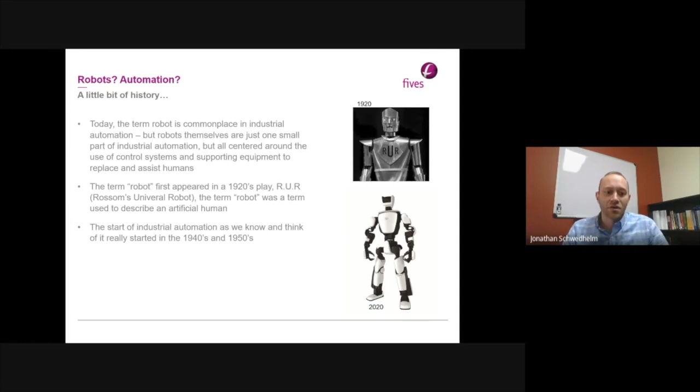So the first example of mixing computers and machines was with the Cincinnati Milacron Hydrotel 3-axis mill. These days, CNC milling is a pretty ubiquitous term. It's used all over the place in manufacturing, and it's kind of like the most basic piece of automation.

While milling machine techniques like turning and milling were first invented in the 18th century, the mid-1700s, and servo motors, which are often used to control those kinds of machines nowadays, have been around since 1834, it wasn't until the late 1940s and early 1950s that engineers adapted these machines to have computer controls to perform the kind of motion that humans couldn't easily do. This really invented the process of computer numeric control, or CNC, which is ubiquitous in manufacturing today.

It was these inventions that really opened the doors to the kinds of machines that we think about today when we talk about factory automation and robots.

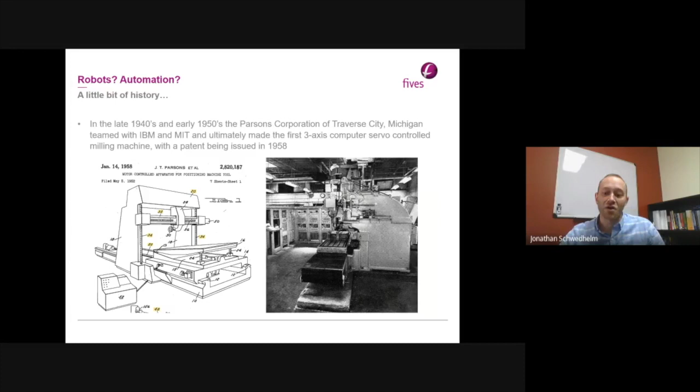So the first patented machine which resembles modern automation was conceived in the 1950s and was coined the Programmed Article Transfer Machine, which is kind of a mouthful. They weren't good at acronyms back then, I guess. But it was a feedback-controlled, servo-driven 3-axis machine for a pick-and-place application.

And at the time, pick-and-place machines certainly existed, things that picked up something from position A and moved it to position B. But what was unique about this machine was that it was programmable and flexible, so they could easily adapt it and reprogram it to each new set of operating requirements.

So this really addressed a problem that we consider pretty trivial and solvable today. Automation or robots like this exist in a lot of different forms. There's SCARA robots, multi-axis gantries, large multiple-axis robots. Those are all off-the-shelf solutions that you can basically pick up a catalog, order, and get it to do what you need it to do with a little bit of programming.

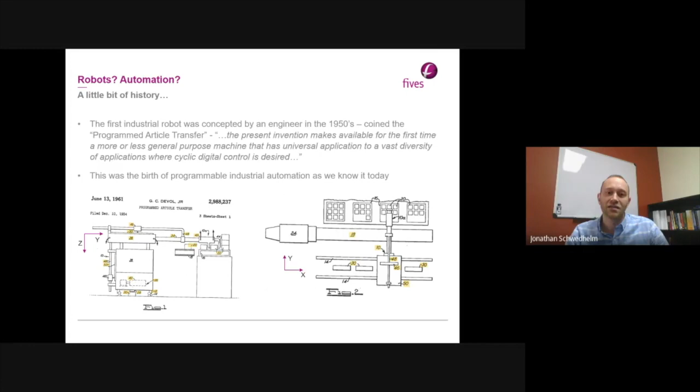But this machine was novel back then, and it really led to the first industrial robot and all the huge advancements in manufacturing over the following decades. So the inventor of this machine partnered with another engineer entrepreneur, and together they started this company called Unimation, and it was based on the East Coast of the US.

And at the time, the US auto industry was already really heavily invested in the concept of industrial robots and automation. So eventually, Unimation found a pretty viable industrial application for their robots in GM's die casting foundry, helping move parts around and in and out of dangerous or hot machines.

And not too long after that, those same robots were used in spot welding operations on the assembly lines. So eventually, one GM plant, which really invested heavily in these robots, was able to produce over twice the number of cars of the next most efficient factory by 1969. This was really huge. It was really a huge game changer.

So factories all around the world kind of caught wind of this and the concept of these industrial robots, and it really became a hot commodity. And people really began to change the way that they thought about processes and adapt them for automation.

I wasn't really able to find a whole lot of detail about the specs of those early robots, but if you search YouTube videos for Unimation or the term Unimate, there's plenty of videos to watch of these robots serving cups of wine and coffee to people, as well as them in actual factories. So they were kind of a gimmick as well as a really useful thing at the time.

But what I was able to find is that the Japanese auto industry really took a huge liking, just like the US did, to these kinds of machines. And they really started implementing them quickly as well.

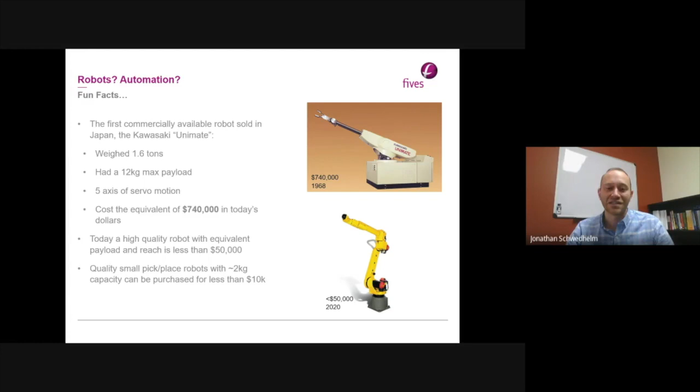And there's lots of really small, high-quality industrial robots from trusted brands that can be purchased for less than the price of a used car, like $8,000 or $9,000. So you can see how industry has really changed as far as capabilities for price.

So from that brief history lesson, it's pretty obvious that the demand for industrial robots and automation is huge. This advancement really relies on companies innovating and pushing the technological and physical limits to create machines and adapt existing processes to meet these needs. So I want to spend a few minutes talking about some of the common reasons why tasks are automated, as well as some of the perceived hurdles that we see our customers have, which are stopping them from automating.

So most of the reasons to automate are pretty obvious and widely discussed. Machines can be designed and programmed to do things better than humans in many ways. Along with that, robots can really be designed to go places and do things that are not safe for humans to do.

Along with that, one of the hugest drivers, obviously, in automation revolves around cost savings and making better products. So this can come in many different forms. Productivity improvements like increased production rates, having better lead times compared to your competitors, reductions in raw material usage or scrap generation, and just general increases in consistency so that you don't have as much of a QA problem.

Of course, along with that, automation can be useful for reducing headcount and thus personnel costs.

So one of the misguided reasons that we see people choosing automation is from a salesperson walking through a factory, dreaming up ways to sell products and solutions, then pushing those solutions to that customer. And obviously, we think it's a really great idea to invite people to your facility to come in and give you ideas and listen to what your problems are, but it's always a good idea to have a good structure around those visits to perform your due diligence before jumping in, especially if you're new to automation and process development.

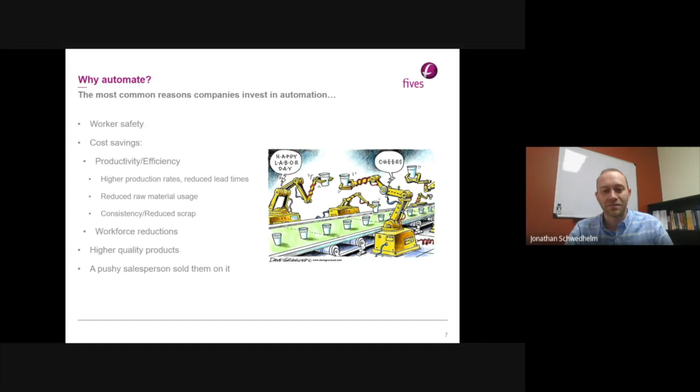So along with that, the top reasons that companies don't pursue automation really vary. In working with our customers, these are some of the top reasons I kind of put together. Obviously, upfront cost is a big thing. Not all processes are really that easy to automate, and the prices can be certainly a stumbling block to get over.

But along with that, capital equipment always isn't available when needed, especially for new companies. And it's a pretty scary thing to write a big check for a piece of equipment or technology that's still kind of unproven or new to you, especially if the supplier is new to you.

One of the other big stumbling blocks is the perceived lack of flexibility. So automation is obviously pretty synonymous with these really large fixed installations that require reinforced foundations, major construction, and they can take up a lot of valuable real estate while you're still just assembling them and pulling them into production. Those are all kind of things that a lot of people consider to be sunk costs.

But that doesn't always have to be the case, because you can design automation to be able to be retrofitted, be flexible, or you can always reuse. If you buy a specific robot, you can always kind of continue to use it in new applications, assuming those applications are conducive to using a robot.

Along with that, some industries, there's a lot of negative connotation around automation displacing jobs. That could be an issue. But two areas that I really want to focus on are cases where there's a perception that the right technology doesn't exist, and companies who lack experience with automation and thus don't really have a strong culture to support it.

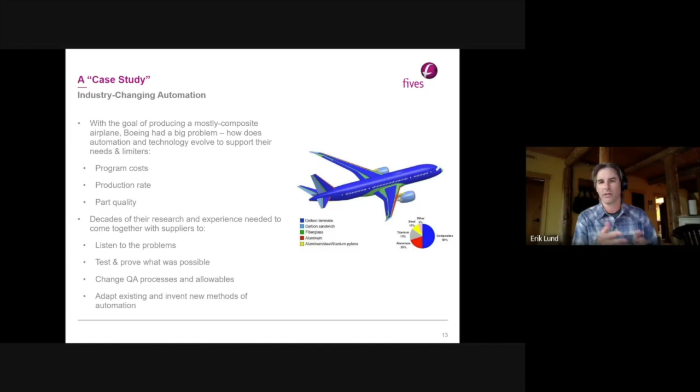Basically they identified that there weren't processes out there, and so what we did is we sat down with a lot of the people at Boeing, all the way from the people who were engineering the plane to the people who were in charge of doing the equipment purchases, and then to the BR&T people, and then all the way to the quality people. At some point we knew we were going to be developing a process that didn't have standard specifications or a way of qualifying the process.

So really, all those people had an influence on how we did the automation, whether it was how we did the inspection systems or how we generally did the adjustments and qualifications of the machines. So even within that realm, we saw, hey, Boeing had its experts, we had our experts, but there were things we wanted to do that weren't expertise we had within those groups.

And so we even looked at, do we need to go outside to trusted suppliers, trusted consultants? Do we need bigger spaces, that type of thing? So I think in general, if you really want to get in and do the things that revolutionize an industry, you sometimes have to have that humility to understand that at some point there might be tools that exist, there might be intelligence that exists, but there might be things you have to go invent or partner with to get to the solution you're looking for.

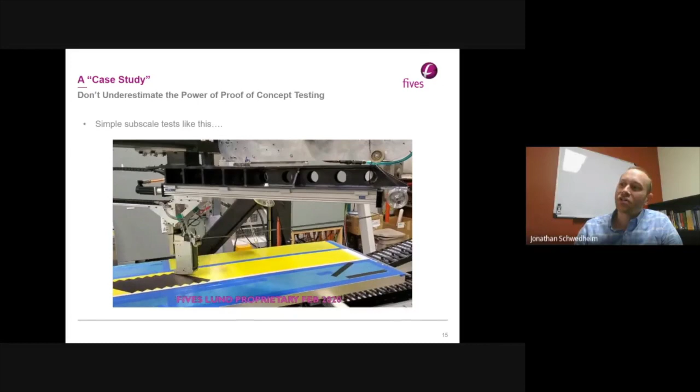So what we were trying to go ahead—sorry, Erik. Jonathan. Okay, so just to get some context, we had essentially a case study where we were trying to develop a new manufacturing line.

This was for some of back when Boeing was interested in doing a new airplane, and the hope was, could we develop the initial enabling technology that would allow us to essentially feed a line that was downstream from this process. And so even though this looked relatively simple, the intent here was that this would feed a multi-million dollar essentially assembly process.

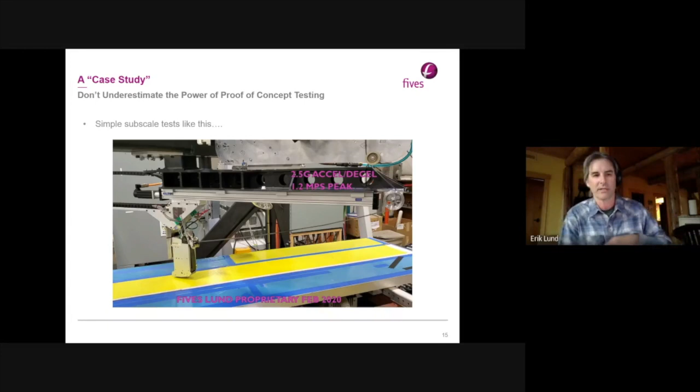And so we had this test here, which is technology that we have, but we also had 2 or 3 other small little enablers. And what we could do is, as you'd expect, we would retire risk on some of those critical items, knowing that there was a lot of other things that would eventually fill in around those critical key technologies. But the intent was, how do we walk to greatness with essentially retiring risk along the way without spending $10 million getting there?

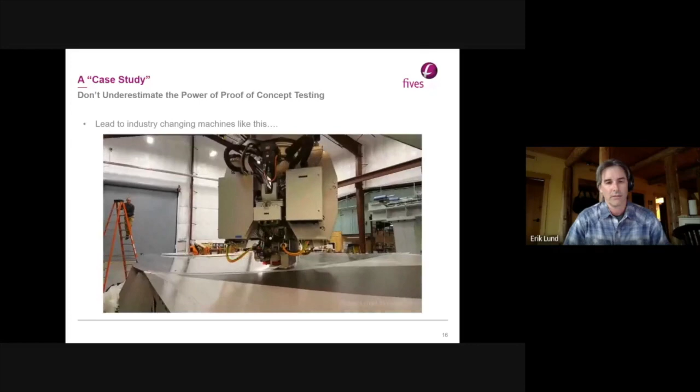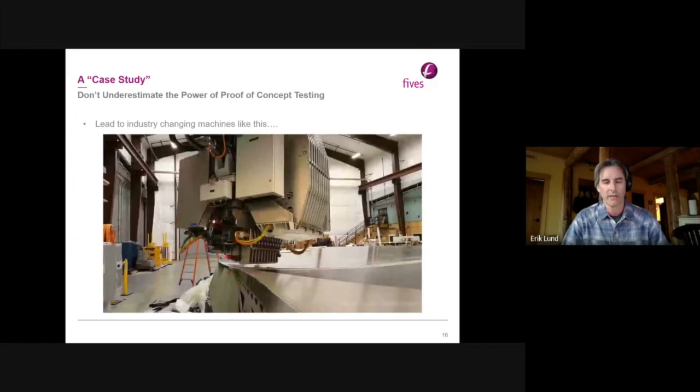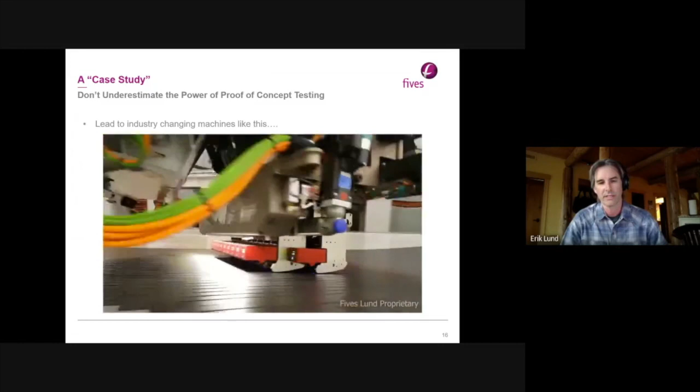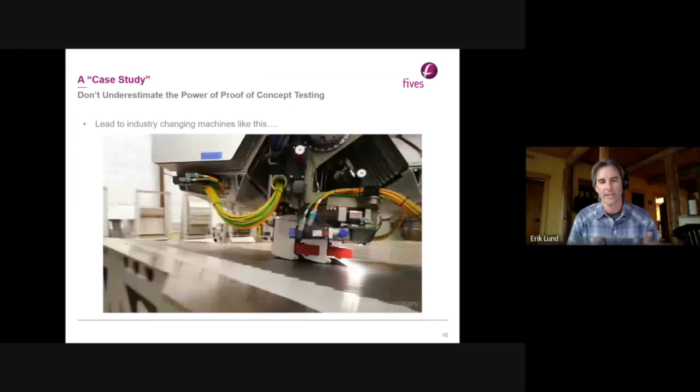So from that single lane, 1.5 inch piece of composite, this is an example of how that comes together, where now we're doing 19 lanes. But essentially before we get to here, we've baselined and understood all the physics associated with each of the 19 lanes. So even though this technology we're allowed to show you here is over 6 years old, it still kind of outlines that single lane testing for this assembly, which was also done back 8 years ago.

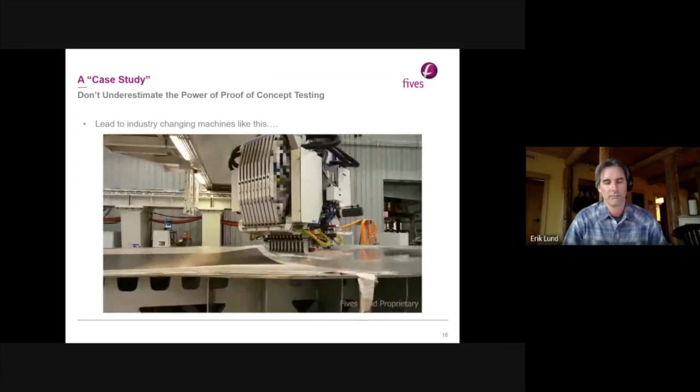So that was a machine that we call Slalom, and we have 3 of those machines at Mitsubishi Heavy Industries. The 3 machines we delivered actually produce all the wing skins for the 787, and essentially made the 8 traditional contoured tape laminating machines that MHI had originally purchased from, unfortunately, our now sister company obsolete—or at least we're doing essentially the work of what they had planned for 10 of those machines to do. So the intent there was, obviously, we wanted to better utilize the tooling and the space in the clean room for composite manufacturing, as well as provide a machine that had better output.

Cool. All right, Aaron and Dean, you want to take over?

Is Aaron on mute? Yes, I am on mute. But am I sharing my intro slide? Yes, I can see it.